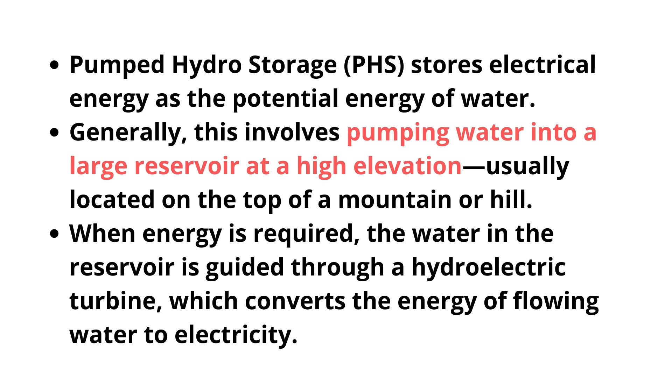Now we will talk about some of its characteristics. First, some of the positive things. Pumped hydro storage has round-trip efficiency in the range of 70 to 80%, which is better than that of compressed air energy storage and hydrogen. They have the ability to store energy for longer duration, even going to months. Also, they have low operating cost and quick start and black start capability, which are very helpful for grid operation. All these services can be provided by them with no emissions, which helps to attain sustainability in the power sector.

However, along with them, there are some roadblocks for them as well, which include high capital investment, long gestation period, which is usually 5 to 15 years, and they require large space for both reservoirs.

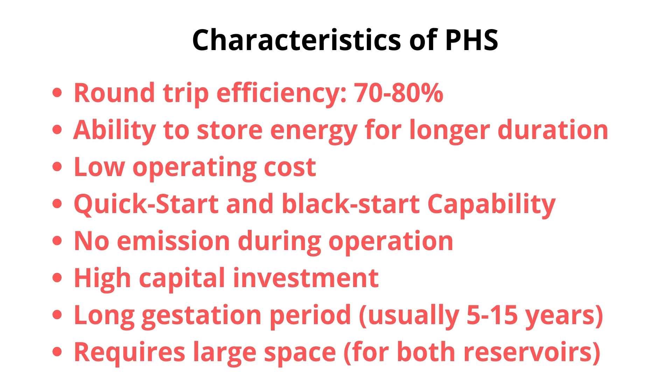Having understood this, let us understand why pumped hydro storage plants are required. They provide adequate peaking reserves, and hence reduce the need to run some conventional plants for such peak demand for short duration. As they provide voltage regulation and frequency regulation, they support reliable grid operation and integration of variable renewable energy sources. They balance the grid for demand-driven fluctuations and balance generation-driven fluctuations.

Because of quick start and black start capability, they improve flexibility in the power grid apart from working as a source for energy storage. They provide ramping requirements in the power grid, which comes into prominence with increasing renewable penetration in the grid.

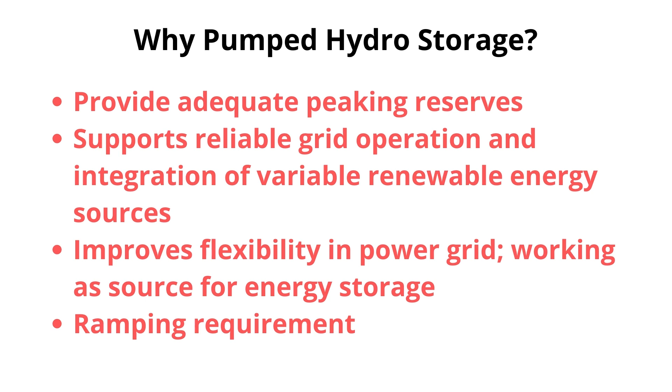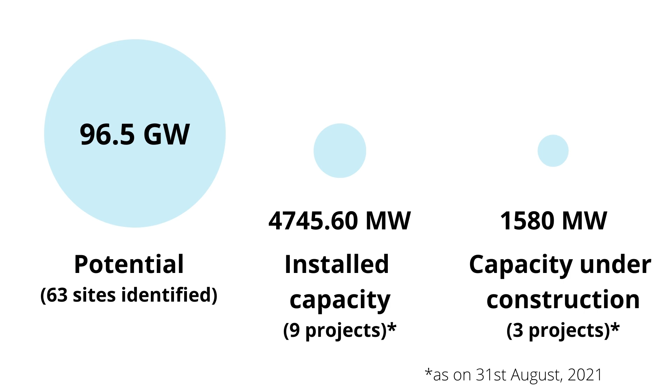Moving forward, we will see the status of pumped hydro storage in India. The potential of pumped hydro storage is estimated to be 96.5 gigawatt for 63 sites. Out of this, as on 31st August 2021, just 4,745 megawatt has been installed in the country. Apart from this, 1,580 megawatt capacity is under various stages of construction.

Now let us see the status of pumped hydro under various stages. 1,000 megawatt capacity is under stage of DPR concurred by CEA. 1,200 megawatt under DPR under examination in CEA. 10,170 megawatt capacity of schemes under survey and investigation. 7,400 megawatt schemes under pre-feasibility report preparation.

Having seen the present status, we need to understand the challenges such projects will face for their development in the country. This has its significance because CEA has estimated 10 gigawatt installed capacity of pumped hydro storage by the year 2029 to 2030. 1. They have long gestation period. 2. High cost overruns are incurred during their construction.

3. In terms of economics of operation, often their tariff and costs are compared with other generation projects. Apart from this, there are presently no norms to determine cost remuneration for balancing and other storage associated services. Such projects are usually located in difficult geographical locations, which cause problems in construction and operation.

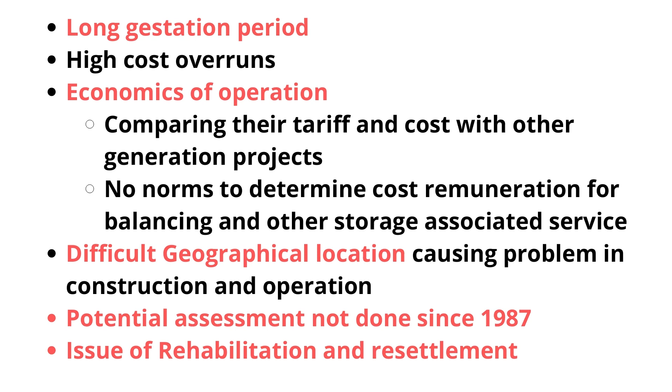CEA had done potential assessment in 1987. However, there are many changes in environment laws and technology, which calls for reassessment of the potential. Added to all this, there is also an issue of migration of people living in those areas, hence calling for their rehabilitation and resettlement and leading to a lot of protest and delays.

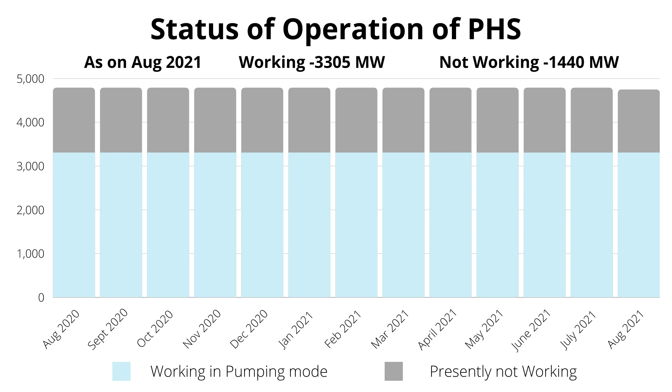Apart from this, there are issues with even the installed capacity. In the last 1 year, the capacity working under pumping mode is just 3,305 megawatt, leaving out more than 1,400 megawatt capacity not running in pumping mode. This clearly indicates that there are some issues with current projects in terms of their technical design and interstate coordination.

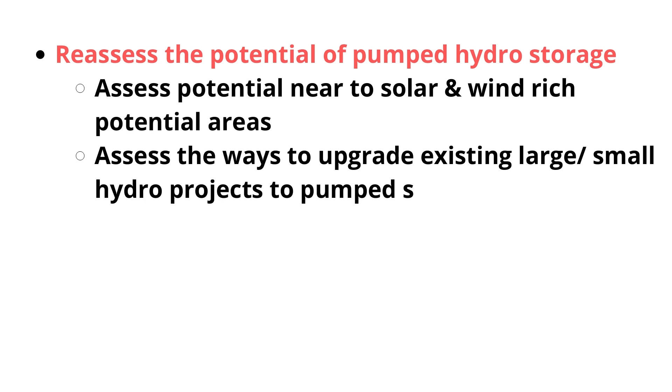Having said issues and challenges, we need to understand how they can be addressed in India. The pumped storage capacity was assessed by CEA in 1987. Since then there have been many changes in environment laws and technology, which calls for reassessment of the potential. Hence, there is an urgent need to reassess the potential. While doing this, one should keep in mind two things. 1. Assess pumped hydro storage potential near to solar and wind-rich potential areas to improve grid reliability. 2. Assess the ways to upgrade existing large, small hydro projects to pumped storage projects.

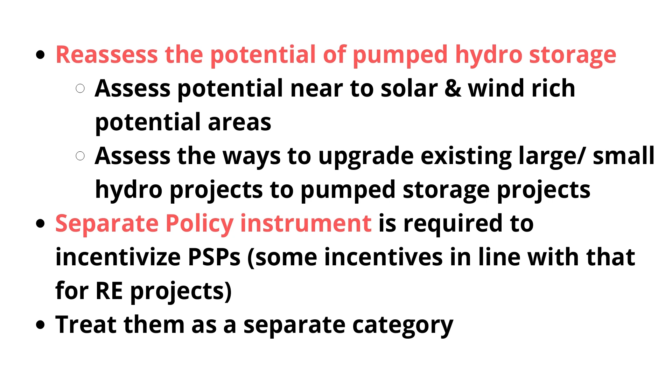Suitable policy may be framed for encouraging and exploiting pumped storage potential of the country. In view of infusion of high renewable energy sources, pumped storage development has to be treated as a separate category. Separate policy instrument is required to incentivize such projects. Pumped storage plants are expected to play a crucial role in meeting the balancing and ramping requirements of the grid. Hence, regulators need to design necessary tariffs for pumped hydro considering the grid services they can provide.

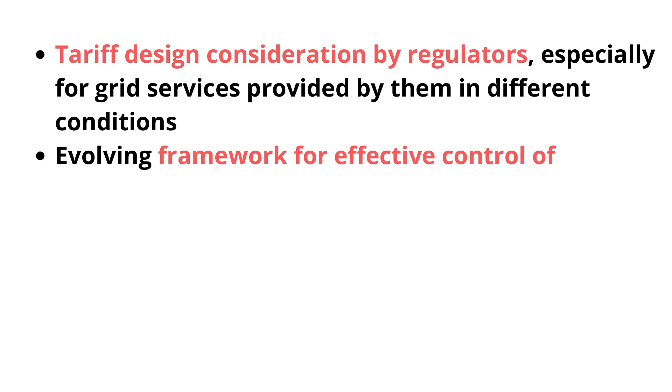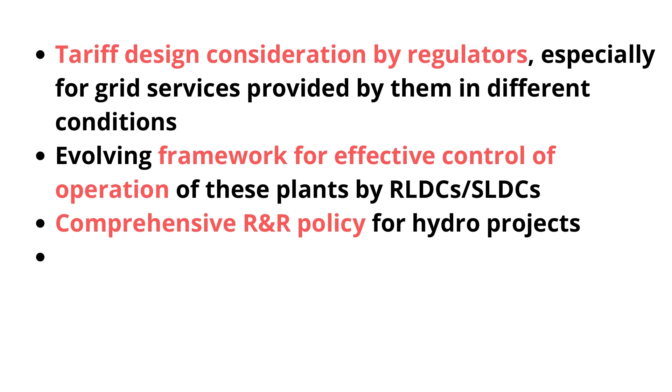For the sake of grid stabilization, effective control of operation of these plants by load dispatch centers needs to be evolved in consultation with states, developers, and regulators. Comprehensive rehabilitation and resettlement policy for hydro projects has to be evolved over time for their better development.

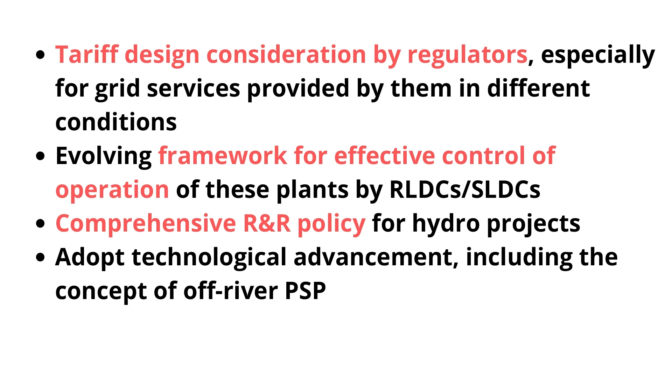Adopt technological advancement. These include adjustable speed pumped turbines, which can quickly shift from motor to generator to synchronous condenser modes for easier and more flexible operation of the grid, and the concept of off-river PSP, which is gaining popularity due to huge benefits arising out of its less capital cost operations. Hope you got a better understanding on pumped hydro storage.